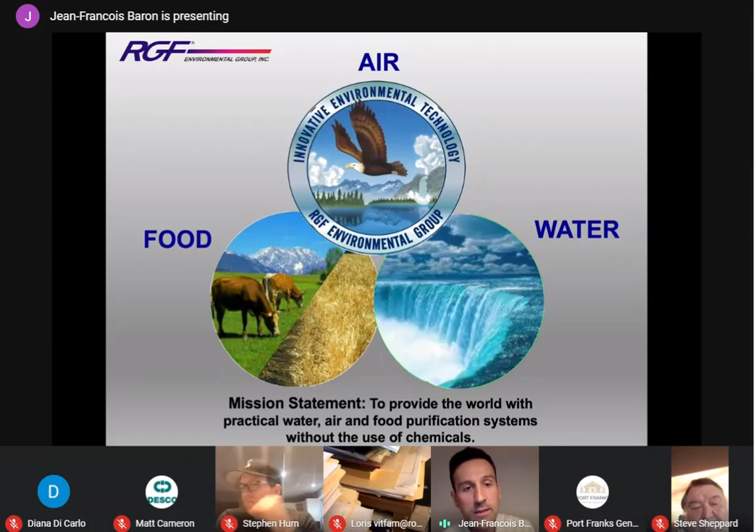We're going to talk today about products from RGF. RGF is a manufacturer based out of West Palm Beach, Florida. It's a private company, in business since 1985. They manufacture products for air sanitation, food sanitation, and water sanitation. They do mostly wash water recycling. Food sanitation is for food transformation plants. They use the same technology that we're going to discuss today to sanitize food in transformation plants.

This is the head office. As I said, it's located in West Palm Beach, Florida. It's about 100,000 square feet. During the pandemic, they bought another building of 40,000 square feet to do some vertical integration, meaning that they had a couple of subcontractors, third-party manufacturers that were manufacturing small parts for their devices, and a couple of COVID-19 outbreaks made these guys close for a couple of weeks, which slowed down everything.

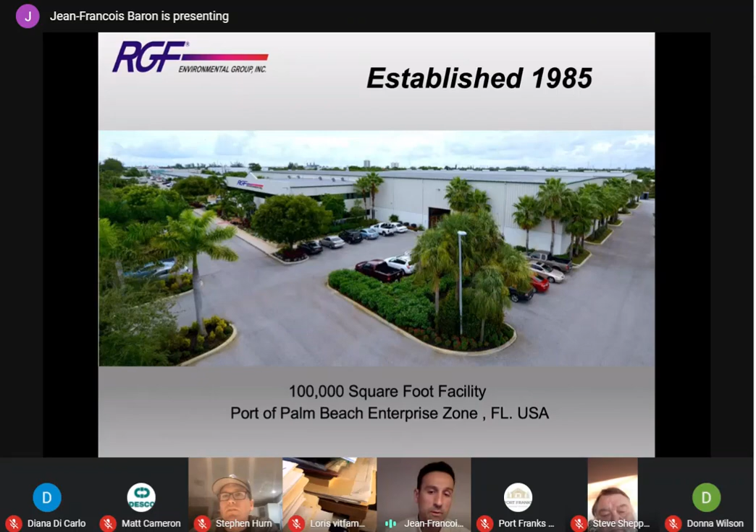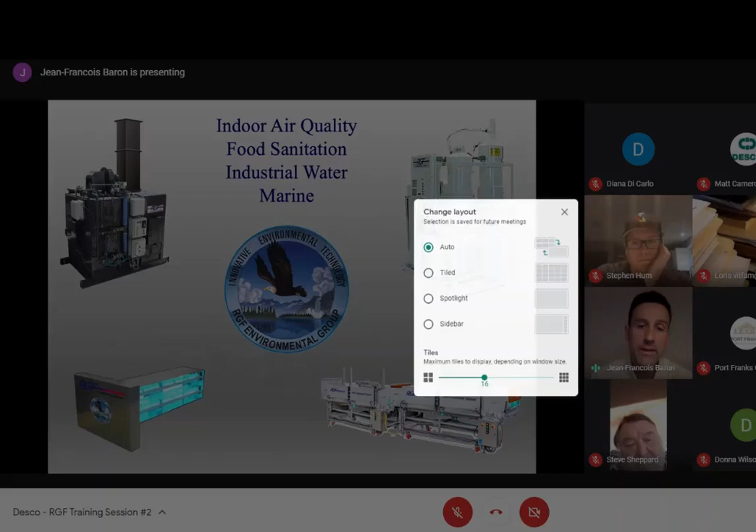So RGF decided to vertically integrate everything. So now everything is built and assembled in-house. They added a 40,000 square foot facility to the already existing 100,000 square foot facility. These are examples of different devices in water purification, air purification, and food sanitation. These are all RGF products, and everything is manufactured in Florida.

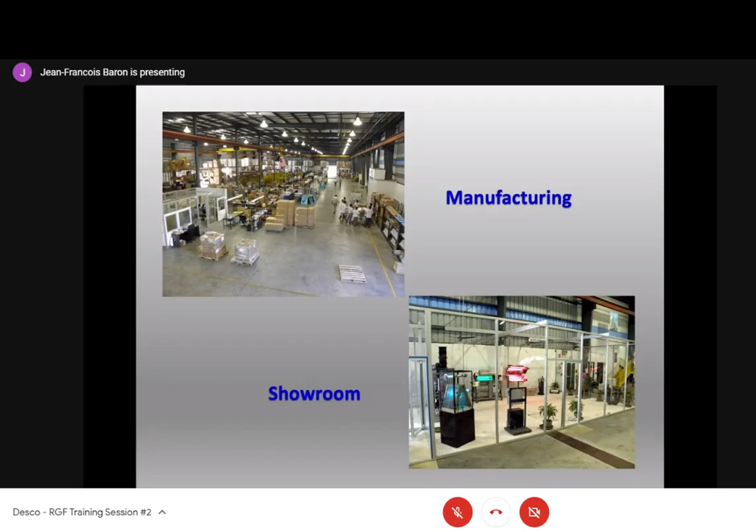The manufacturing facility, the picture in the upper left, is super clean, one of the most well-organized manufacturing facilities I've seen in my career. I worked in lighting, in automation, in different industrial equipment. This is a fantastic place. Everything is designed and built in-house. The showroom as well is very impressive. They have organized tours in the facility in Florida, and they're very much present in all the HVAC trade

shows in North America. They have a testing R&D lab and an electronics R&D lab as well for their research and development. You're going to see a new product using LED modules that was developed in the last few years and was launched a bit more than a year ago, the Halo LED. We're going to discuss it a bit later.

They also have results on tests that they conducted, but they do not publish the tests that they conduct. They have third parties, we're talking about universities and certified labs, do the tests and publish the test results. So they have independent sources confirming that the technology is very effective, very efficient in destroying air pathogens such as microbes, gases, smokes, and airborne particles.

RGF sells in China, and don't be mistaken, they do not manufacture in China. Everything's manufactured in Florida. In 2002 and 2003, when SARS hit Asia, RGF sales really had a big burst in the Asian market. So they do have a sales office. They sell a lot of products in Asia. They also sell in Europe. They have about 5 million units working right now around the globe.

And to give you an idea, in the last year, they had an increase in product demand of 1,000%. So the numbers of the year 2021 are going to be probably 10 times bigger than the numbers of 2019. A lot of awards, especially for their designs, a lot of patents as well.

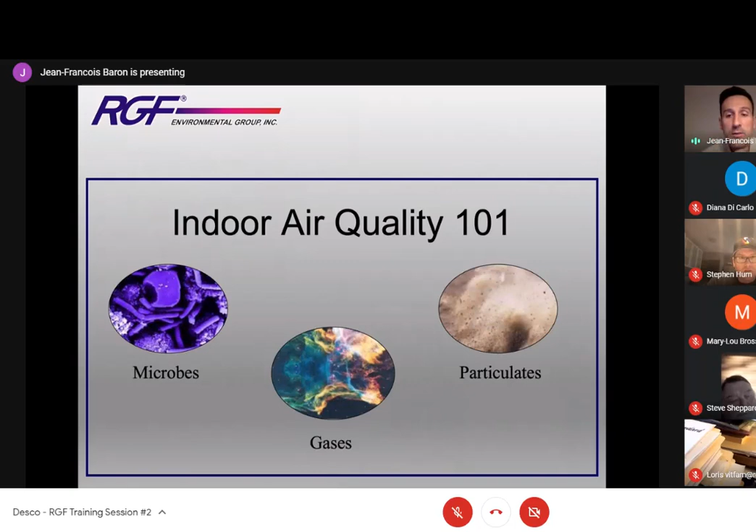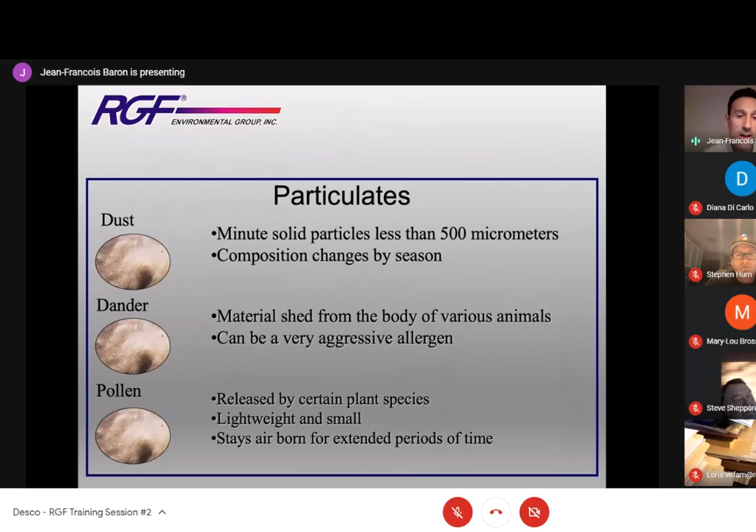So we have 3 different categories of pathogens that can be treated with different technologies. We have the microbes, the gases, and the particulates. The particulates in 3 different categories: the dust, minute solid particles less than 500 micrometers. Composition changes by season. The dander, material shed from the body of various animals, including humans. So you definitely have dander in your house, even though you don't have any pets. You have a lot more if you have pets. So this can be a cause of allergy. Pollen released by certain plant species, lightweight and small, they can stay in the air for a long period of time, and I'm sure some of you have some allergic reactions during certain periods of the year due to pollen floating in the air.

Microbes, we have 3 categories. The bacteria, examples are E. coli, Staphylococcus, Streptococcus, so these are all bacteria. Viruses, of course, we all know about COVID-19, Norwalk, which is the common stomach flu, SARS, avian flu, H1N1, these are all viruses. Mold, that are initially spores. So the spores will develop into mold when we have a perfect mix of temperatures higher than 30 degrees Celsius and humidity higher than 60%. So the spores will develop into mold in different areas where the temperature and the humidity allow for it to develop into mold.

I want you to pay attention to this graph. It's very, very important. It's very relevant to what we're living right now. These next few slides have been presented by RGF for the last 10, 15 years. In the last few months, the authorities, we're talking about Health Canada and CDC, the Center for Disease Control in the States, the 2 highest health authorities in North America, have been going back and forth as to whether the virus was contagious by air. So was it contagious by aerosol? Was it airborne? So now they're unanimous that the virus can be airborne. The virus can travel a lot more than that 2-meter social distancing.

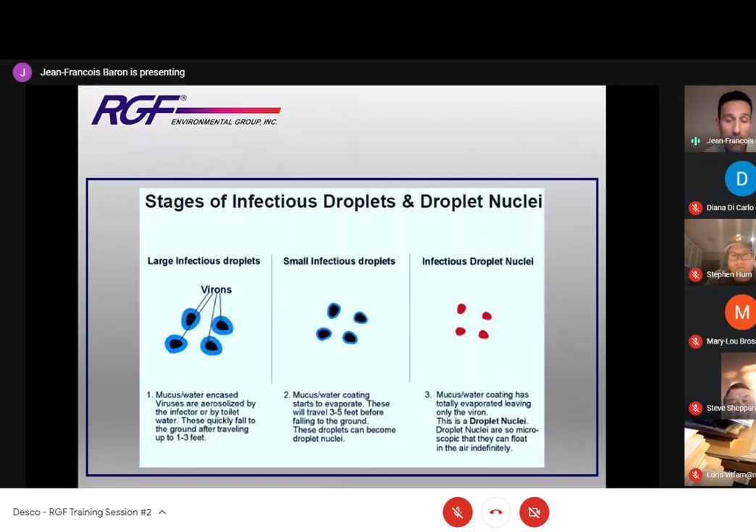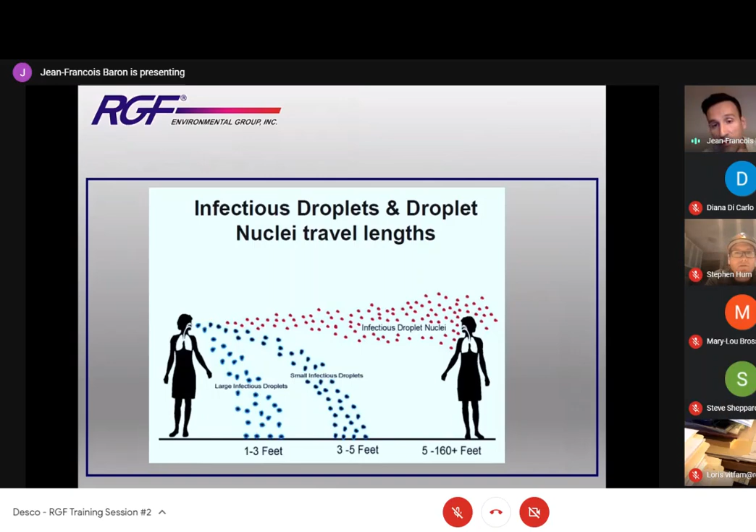So here we can see that the large ones will fall 1-3 feet. The small ones, slightly dehumidified, will travel 3 to 5 feet. But the infectious droplet nuclei at its most dehumidified form can travel up to 160 feet. So in a room where we have an infected individual coughing or breathing, the infectious droplet nuclei can travel much further than 2 meters. So it is very important for everybody to understand that the contagion risks are 20 times higher indoor than outdoor.

So having an individual that is infected, coughing or breathing, throwing some infectious droplet nuclei in the same room, if you don't have your mask, or if it falls in your eye or in your ear or on your hands and you scratch your nose a bit later, it's not the majority of the infections, but still this is one of the probabilities of being infected. So these infectious droplet nuclei can travel much further than 2 meters from one individual to the other, but they can also get back in the HVAC system and travel in the ducting.

So it's very important to know that this information has been promoted by RGF for a long time, and now this is actually endorsed and communicated by the highest authorities, which are Health Canada and the Center of Disease Control in the US.

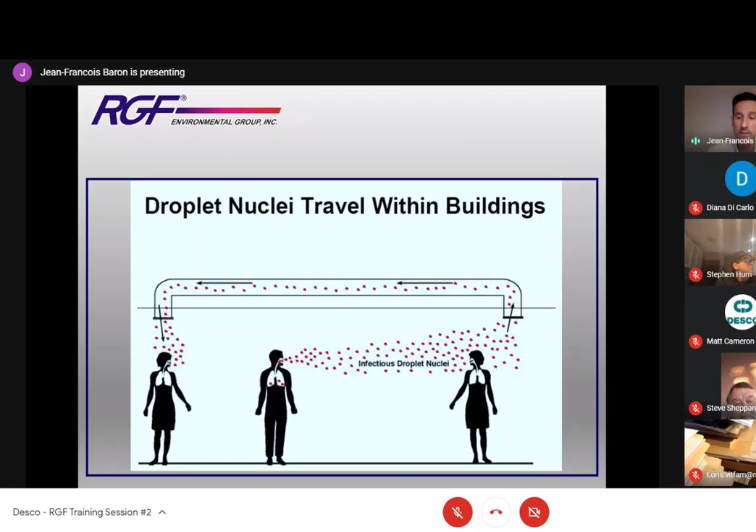Another pathogen, the gases, the VOCs, volatile organic compounds. If you walk into a new house, you're going to smell the paint, the varnish, the glue, the adhesives, carpets, cleaning agents, also nail polish, the presswood products because of the glue. So the VOCs can cause eyes, nose, and throat irritation, headaches, of course, in extreme cases, loss of coordination, nausea. Another gas type category are the odors, pet odors, perfumes, food odors. So we have the microbes, we have the particulates, and we have the gases that can be pathogens, bad for occupants in indoor air. So how can we treat these pathogens?

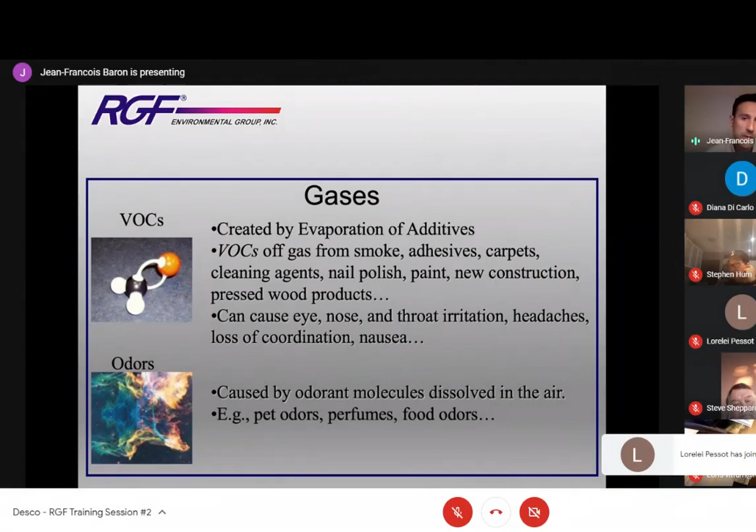So the different treatment technologies for microbial and gases, we're going to start by the oldest one, very well known by everybody, the germicidal ultraviolet light. So germicidal ultraviolet light was discovered in the 1950s. So it's a technology that was discovered 70 years ago. It's very efficient, it's proven, but it has some serious limitations.

So the germicidal UV light is a set fixed wavelength of 254 nanometers. So most UV lights that we're going to see on the market are fluorescent lights. And these fluorescent lights will have a specific coating inside the tube. It's composed of different phosphor powders, and it lets that specific 254 nanometer spectrum out. So that's the only radiation that will come out of that fluorescent tube. So ultraviolet germicidal lights are effective.

It destroys the DNA. But in order to destroy the DNA of an organism, such as microbe or virus, bacteria, or mold, it needs to be powerful enough. What we mean by that, the power of the lamp is important, and the time of exposure is important as well. So the closer you are to the lamp, the better it is. But the further you get away from that lamp, it becomes exponentially inefficient. So it's the inverse square law. So as further you get from that source, that UV source, it becomes exponentially inefficient.

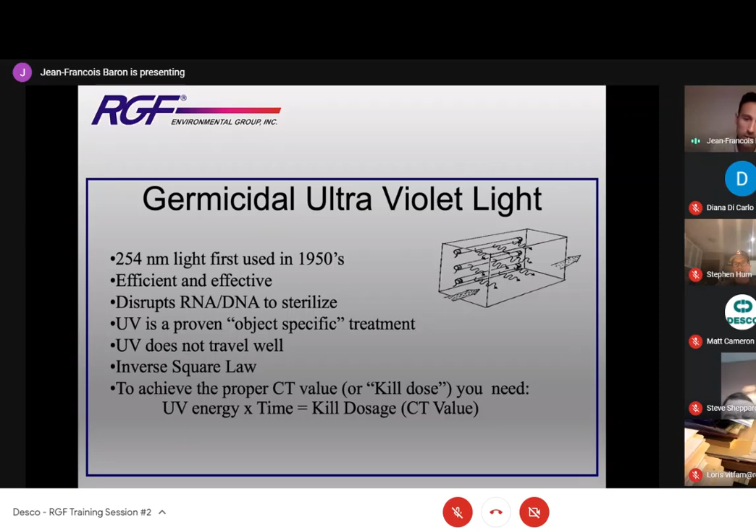Think of a candle like germicidal UV. If your hand is a foot from the candle, you don't feel anything. If it's 3 inches from the candle, you're gonna feel the heat. It's not gonna burn, but you're still gonna feel the heat. If it's 1 inch from the candle, of course it's gonna burn, but it's gonna burn you seriously if you stay there for a long period of time.

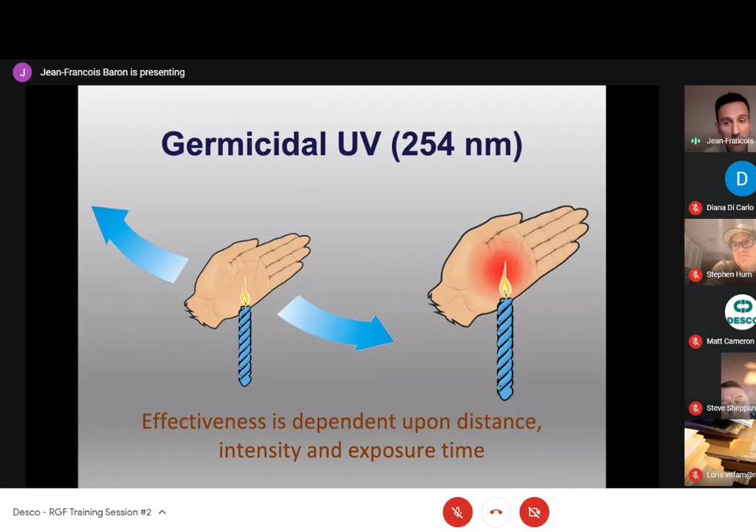So that's pretty much the same with germicidal UV radiation, germicidal lamps. It needs to be close enough to the source for long enough. On this graph, you see that UV germicidal lamps are passive air purification.

We have an example here of a system that is 1600 CFM that is going through a 16-inch by 16-inch duct, and it moves at 900 feet per minute. That's about 16 kilometers per hour, 10 miles per hour. So it's a 36-watt UV lamp. So it's a fluorescent 36-watt UV germicidal lamp. To show you how big it is, a 36-watt fluorescent lamp is about 3 foot. So it's a 3-foot lamp.

And on the first line, we see the distance. So we're considering the distance that the air and the pathogens are passing from the lamp. So at 1.5 inch, we have an effectiveness of about 100%. And this is because the minimum required sterilization time, so the time that the pathogen needs to stay exposed to the lamp, to that 36-watt lamp, is 0.18 seconds. So it flies by pretty quickly in that 1600 CFM system, and the microbe travel time is 0.16 seconds.

So it's slightly faster, but we're going to round it up to make sure that we're objective, and we have an effectiveness of 100%. So whatever pathogen passes by at 1.5 inch from that 36-watt lamp or less, it can, of course, be in contact with the lamp or be in between 1.5 inch and directly to the lamp. So everything that passes in that zone is going to be sanitized.

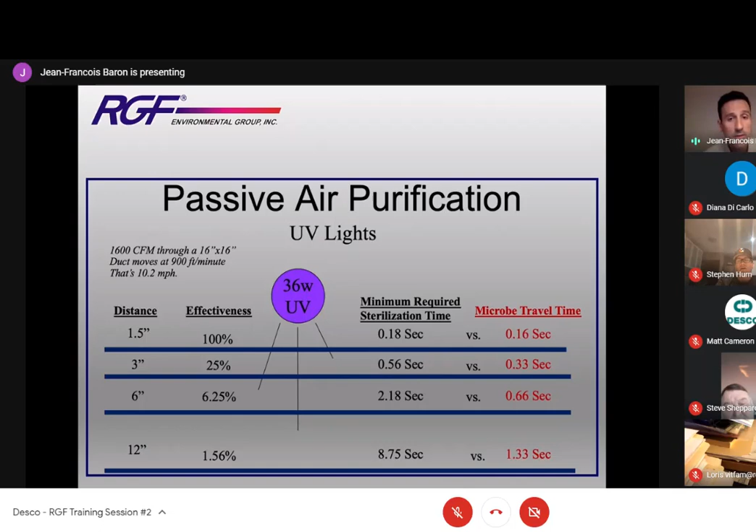But don't get me wrong, there's some applications where UV germicidal lamps are very effective. If you see here, a coil with a UV stick lamp is very effective because we have continuous radiation, and when the sticks are disposed, you have sufficient amount of UV lights on your coil, you're going to be able to keep it clean because you're going to have enough UV power for long enough continuous radiation on the coil, so it's going to keep it clean.

So as you can see on this picture, everything around that lamp is super clean, but as you get further at the right, you see that the mold has developed because UV does not travel. It's like the candle. If your hand's at 2 feet from the candle, it's not going to burn, you're not going to feel any heat. So it's the same with the germicidal ultraviolet light.

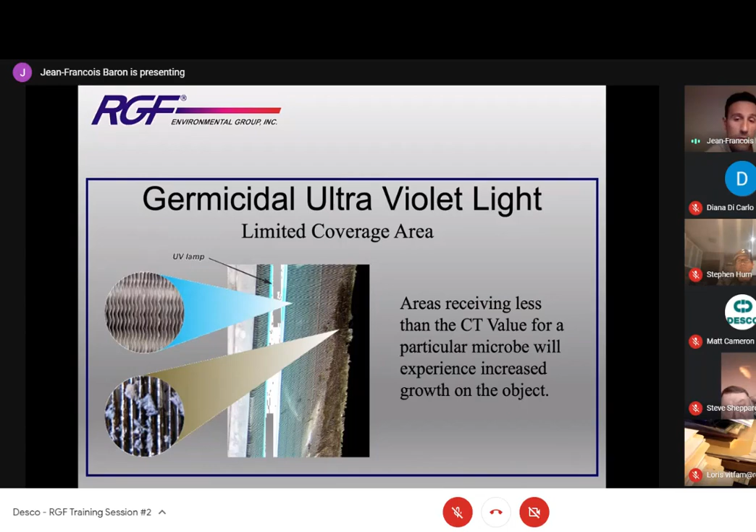So in order to keep your coil clean, you do a good installation, you have enough lamps that will shine properly at the right distance, and in continuous radiation, your coil is going to stay clean. But you need to make sure that you have enough UV lamps on that coil so it stays clean. For your information, RGF is manufacturing these UV sticks to install on the coil because this is the perfect application for germicidal UV lamps.

For air purification, it is very, very limited. The action on the air passing by is just going to be a small fraction of the full volume of air flying by that germicidal UV lamp. And it has absolutely no impact on the air in the environment and on the surfaces in the environment.

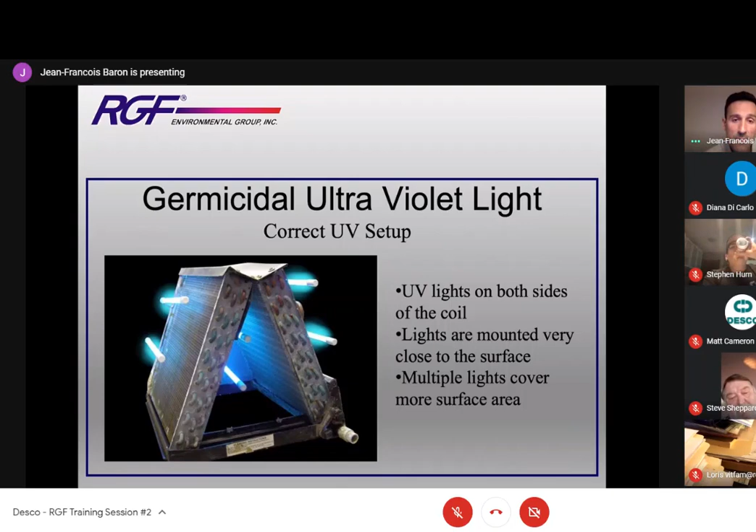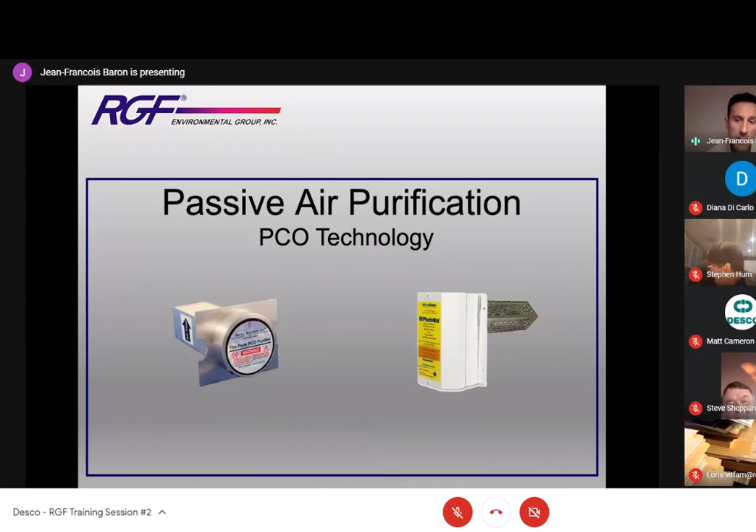So in there, you're going to have the power supply for the UV lamp. The UV lamp is going to stick out in that rectangular square tube, perforated tube on the other side. This will be inside the ducting at the return of the system. So inside of that tube, there's the UV lamp and there's a titanium oxide plate.

So we have a reaction that takes place on the surface of the catalytic bed. So it's an oxidation reaction. It's going to create hydroxide and ozone, and these oxidizers will destroy the DNA of all microbes. The higher the surface area and the more UV energy that reaches it, the more efficient.

So in order to have something that would be very efficient, and same goes for the UV germicidal lamps, we would need to have a wall inside the plenum. So it would pretty much block the airflow. We would make sure that all the pathogens are going through cylinders of PCOs, and it would have a very much maximized sanitation action. But it would definitely have a super high cost, and it would definitely impact the airflow of the system.

So the PCO is effective on the surface, in the volume of air of that tube, but outside of it, there's no oxidizers. So everything that goes through that tube is going to be treated, but under, over, and on the side, all the pathogens will just keep on flying in the system.

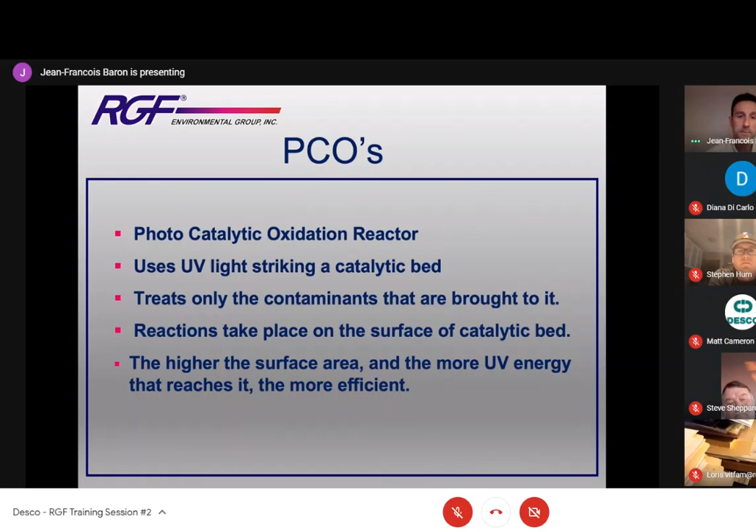Think of a bug zapper. You can have flies spinning around it all weekend. If they don't go inside, nothing's going to happen. So it's really within that cylinder that the sanitation action is happening. Everything around it, there's no action whatsoever.

Now we're going to talk about photohydroionization. So remember the PHI technology from RGF. So PHI, photohydroionization, is the creation of hydroperoxide from a reaction that takes place between UV light. So PHI technology is using UV light as well, but in a broad spectrum. So it takes place between the UV light, the air, specifically more the oxygen, O2, and water, H2O, and the quad metal catalyst. These hydroperoxides are friendly oxidizers, very effective in breaking down both airborne and surface-borne microbes.

So when we say airborne and surface-borne microbes, the hydroperoxides are stable enough to go in the entire volume of air and sanitize every cubic inch of air and every square inch of surface. So the devices from RGF are installed in the feeding plenum. And if you read correctly, you will see that the UV light, the air, and the quad metal catalyst are generating hydroperoxide. So the UV light is not used as a germicidal action. The UV light is used to generate an advanced oxidation process with the air and the quad metal catalyst.

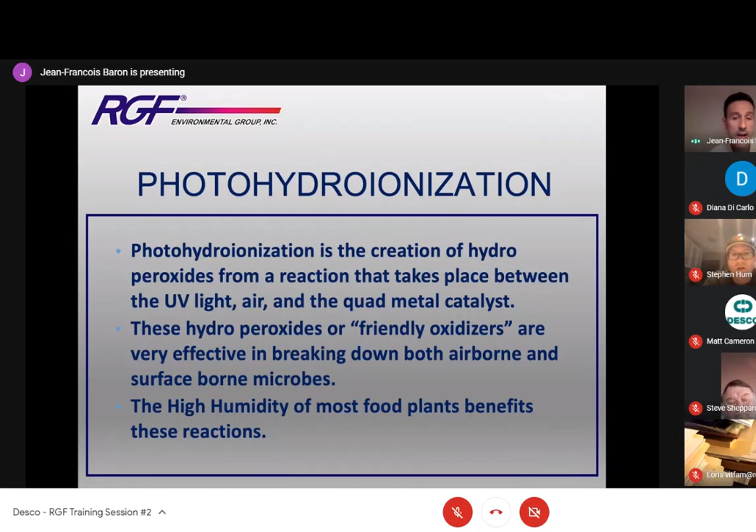Here we have a broad spectrum lamp, which is between 100 and 380 nanometers. So this covers UVA, UVB, and UVC. So we're not trying here to compete or to compare to UV germicidal lamps, because this is not at all the same action that we're using UV rays for in this technology. We're using the UV radiation to generate an advanced oxidation process. So it's not the UV light that will sanitize the environment, it is the hydroperoxide ions that are pushed in the entire volume of air and on all surfaces.

Around that lamp, you see that perforated grid. This is the quad metallic hydrophilic coating. So that quad metal has titanium, rhodium, copper, and silver. So this composition of metal, the broad spectrum lamp, with the interaction of the water and oxygen in the air, creates the advanced oxidation process.

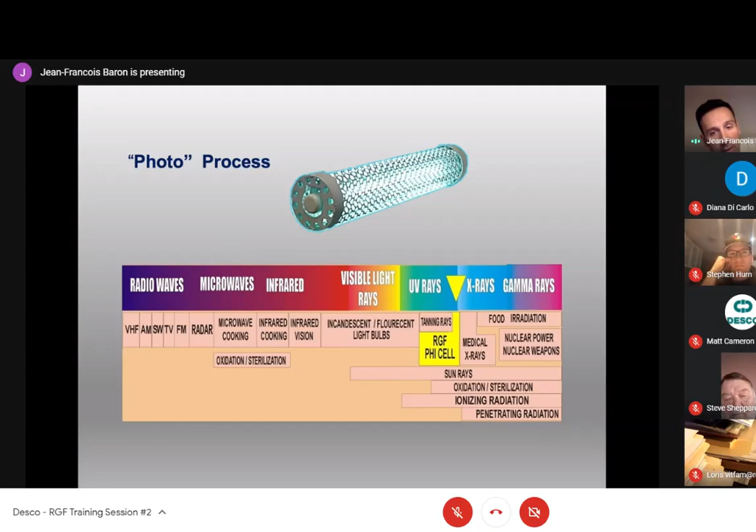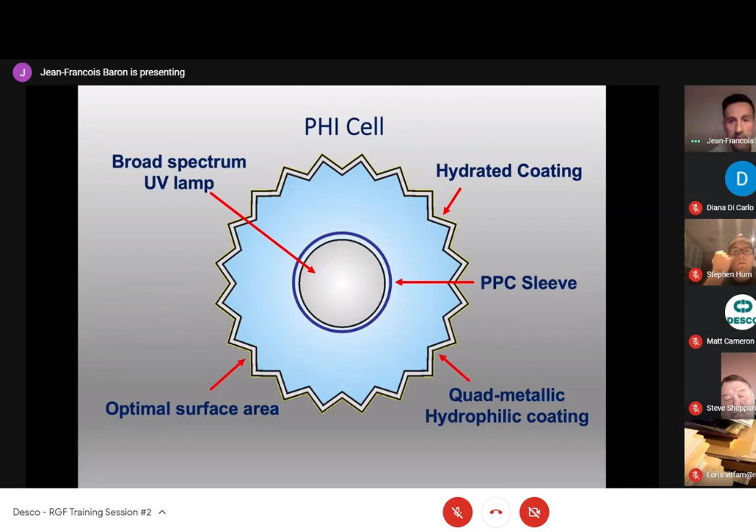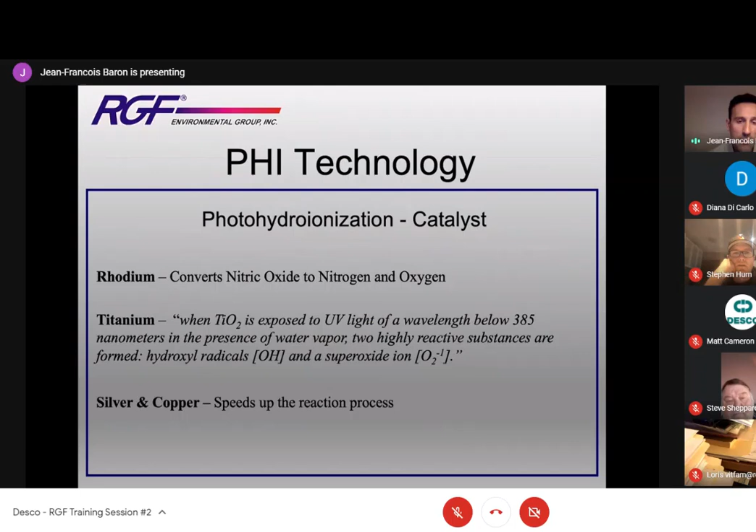So here we have the different metals used in the catalytic bed: rhodium, titanium, silver, and copper. So here we have the reaction happening with the catalytic grid. The important thing to remember is that the catalytic grid is not wearing out or decomposing. The metals that are on that grid around the lamp are just going to stay there. They're going to stay the same.

They do not change the composition of the air because it's H2O, the water vapor, and O2, the oxygen, that will convert in the advanced oxidation process into H2O2, which is hydroperoxide. So the hydroperoxide ions are active for about 15 minutes in the environment. If they do not run across a pathogen, they're just going to revert back to oxygen and humidity. So H2O2 is going to go back to O2 and H2O.

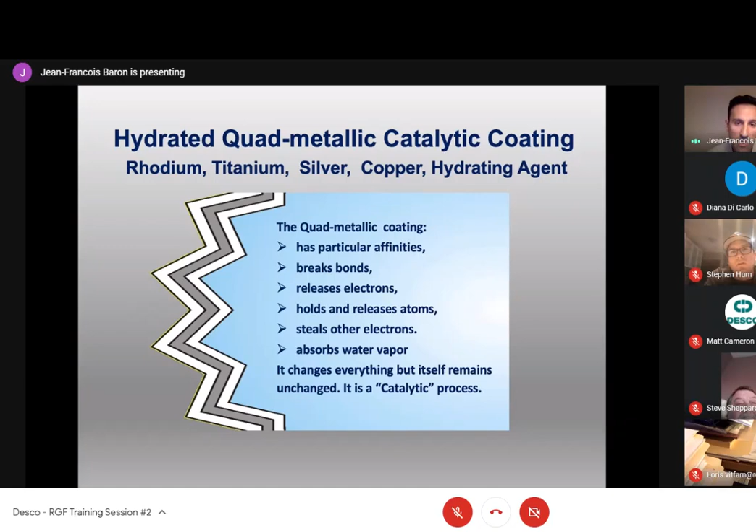And if they get in front of a pathogen, they attack it, destroy it, and they revert back to oxygen and humidity. So it does not change the composition of the air.

So why is the PHI technology so unique? By utilizing a broad spectrum lamp combined with PHI target, which is the grid of titanium, rhodium, copper, and silver, we not only produce conventional AOP, advanced oxidation process reactions, on the cell surface, we also produce advanced oxidation process reactions within the air that passes through the cell. Hence, the hydroperoxide ions that are freed are pushed in the entire volume of air, and they kill the pathogens on the surfaces as well.

RGF, as I mentioned in the beginning, is very, very keen on testing everything. So they did a sneeze machine. It's a very interesting invention. They're going to take some fluid loaded with microbes and shoot them out at the speed of a human sneeze, about 100 miles per hour. It was proven by independent tests that all the viral charge in that fluid pushed out as a sneeze was immediately reduced by 99% within 3 feet of the outlet of that sneeze machine.

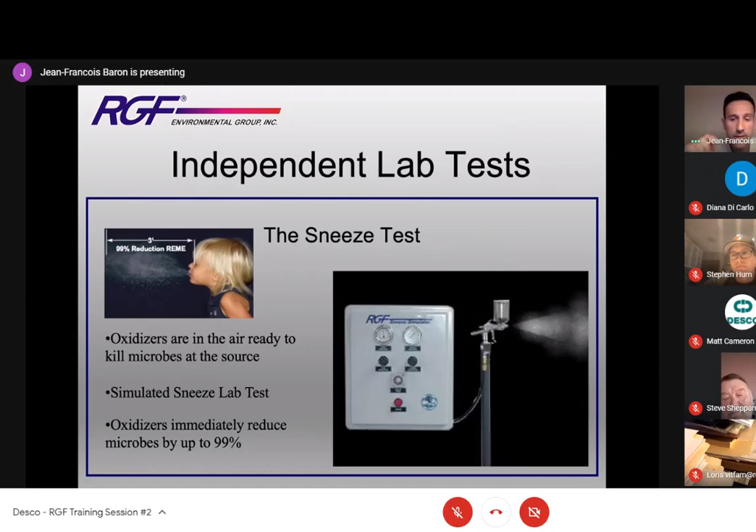So, important thing to know, there's a lot of products out there that will claim that their technology eliminates viruses in the air. The thing is, you always need to know what's in the fine print. So we have competitors that will do some tests in very tiny biochambers. I'm talking about something as big as a microwave or even a shoebox. Any electronic that you turn on in such a small volume of air would generate some ozone. And that concentration of ozone would destroy any pathogen, virus, microbe, bacteria, mold in that small volume of air.

On the other hand, RGF is testing in real life environment. So the biochamber in which they completed the test is over 1,200 cubic feet. And the tests were conducted with the viral charge on stainless steel. There's a lot of manufacturers that will claim that their device kills all the viruses in a very short period of time, but some of them are doing tests with their viral charge on aluminum.

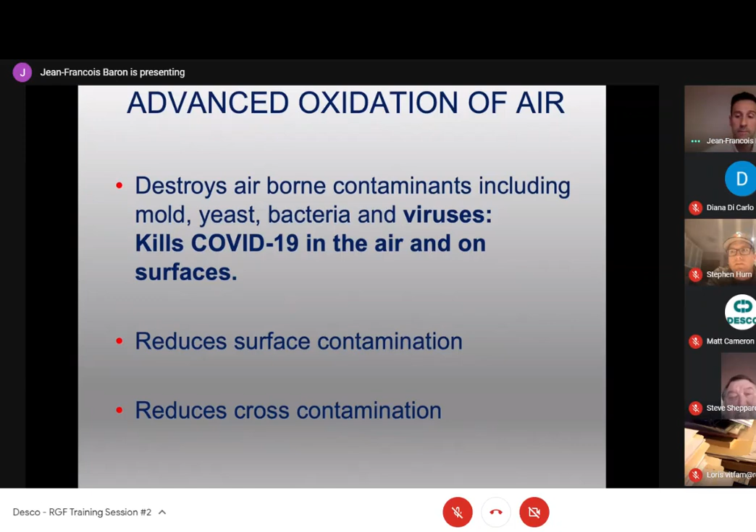So all UV lamps will last... Fluorescent UV lamps will last between 1.5 to 2.5 years. So that's the maximum that you can get out of a fluorescent UV lamp, all manufacturers together, it's always the same technology of fluorescent lamps. So this one here has a warranty of 7 years on the power supply and 4 years on the LED modules. It's also certified zero ozone.

So all fluorescent lamps for UV germicidal applications will emit ozone, but they're within 0.05 ppm of ozone maximum. So this is the standard for North America, for Canada and the States. This device here, the Halo LED, is certified zero ozone. So instead of having a maximum of 0.05 ppm of ozone, it is below 0.005 ppm of ozone. So it produces pretty much no ozone and is going to be a lot more effective in producing hydroperoxide.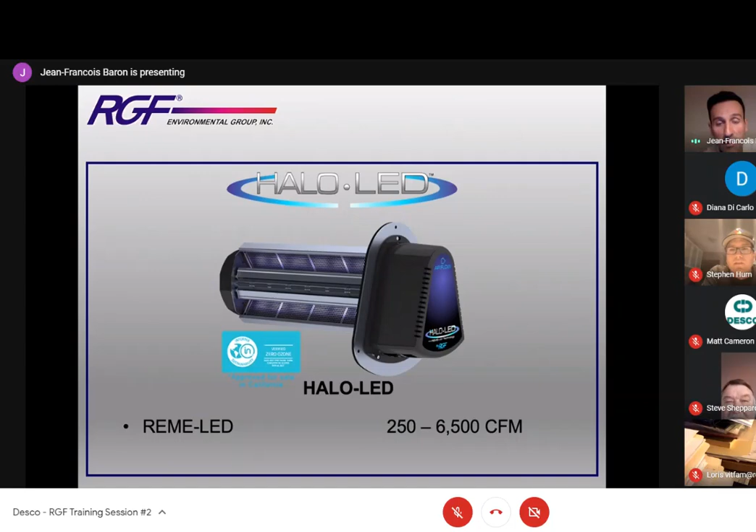The REME Halo. So this one is using the PHI technology with a fluorescent lamp. It's going to be good for systems between 1,000 and 6,500 CFM. Very good product as well. Its maintenance is a bit more frequent because of the fluorescent lamp, which has a 25,000 hour lifespan. So you would need to change the cell every 2.5 years. Very simple. You don't really need any tool. It's all quick connect. You disconnect the lamp inside and you connect the new one with the cell, and that's it.

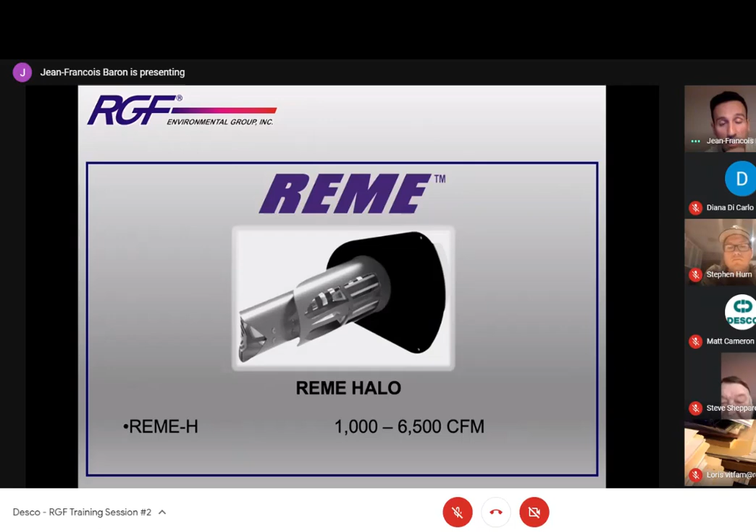The REME Ion, this is a tabletop device, slightly bigger than a can of pop. It uses LED technology as well. So you can have that square plate with the LED modules that generates the hydrogen peroxide with the advanced oxidation process. It also has a bipolar ionizer integrated. It has a very quiet fan, very nice design. That white button is just a touch button, very, very effective. Very quiet. It covers up to 200 square feet, and also you have as an accessory a USB cable. This works on 12 volts, so you could actually plug this into a car when buying the 12 volt USB cable.

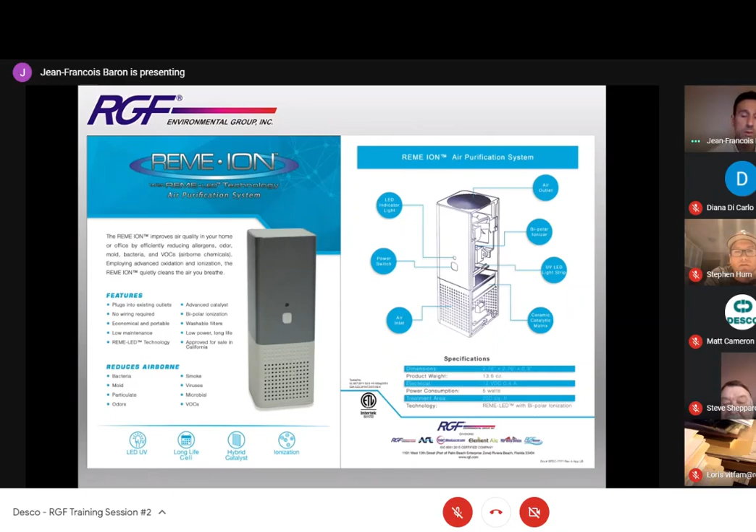The Halo Rove, that product is fantastic for areas where you don't have HVAC systems. So it is available in 120 volt and 12 volts. So the 12 volt version is going to be good for transit. We're talking about school buses, coach buses, trams, metro wagons. It can be attached to the wall or just on the desktop. It's a very solid aluminum enclosure.

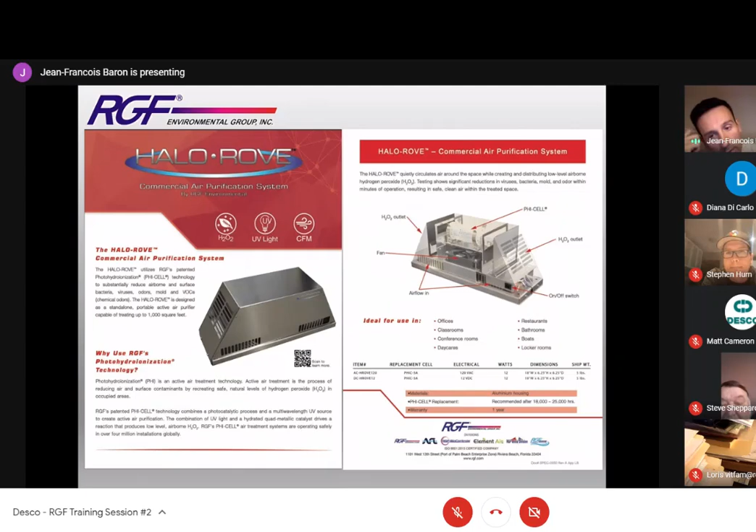You have the PHI cell inside. The fan is 75 CFM, and you have the outlets on the sides where the hydrogen peroxide is freed in the environment. So as I said, it's available in 12 and 120 volts, and it covers up to 1,000 square feet.

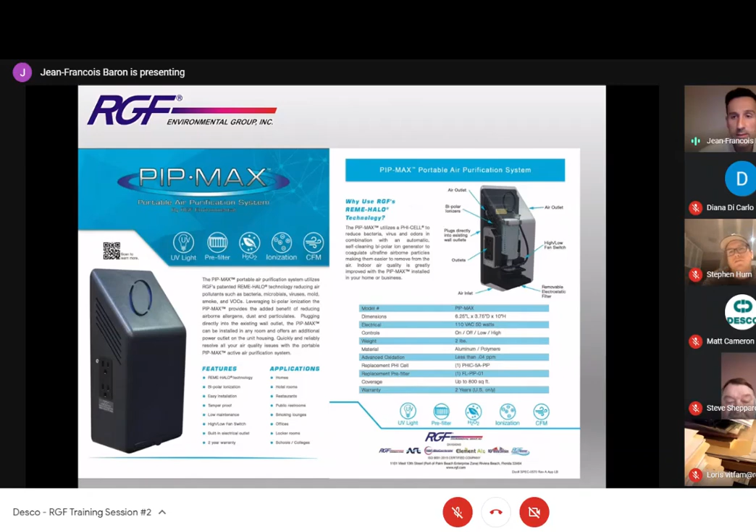The PIP Max, that device goes directly over an electrical outlet, so a regular double electrical outlet on the wall. You don't lose the outlet, as you can see on the box on the side of that enclosure. You still have the outlet on the side. Also, that device has an integrated bipolar ionizer. So the PIP Max covers up to 800 square foot, and it's a 2-year warranty on that device because it's using fluorescent technology.

The Guardian Air, you can recognize the PHI cell. It's a longer cell, it's a longer lamp. It's going to generate some more hydrogen peroxide. It's good for systems between 10,000 to 18,000 CFMs.

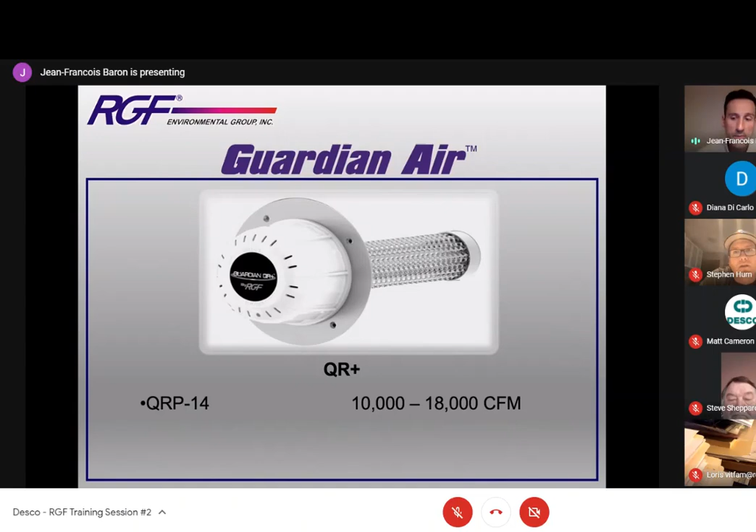The mini split unit, so you can see that strip on the top of the mini split head. The PHI cell is going to be in the center of that, and there's some baffle directing the air towards the cell that goes inside the head and that are pushed outside with the fan of the mini split head. So 2 major benefits. Of course, you're pushing some hydrogen peroxide in your full volume of air in the environment and sanitizing the surfaces as well. That's number 1, very important.

But you have the oxidizers passing through the head, so there's a lot of mold developing in the mini split heads. So you're pretty much canceling the maintenance. When you have that mini split PHI unit, it's going to keep your mini split head clean, and you're not going to need to clean it once in a while because with all these oxidizers going through it, the mold is never going to be able to develop. It's good for systems between 250 and 2,000 CFM.

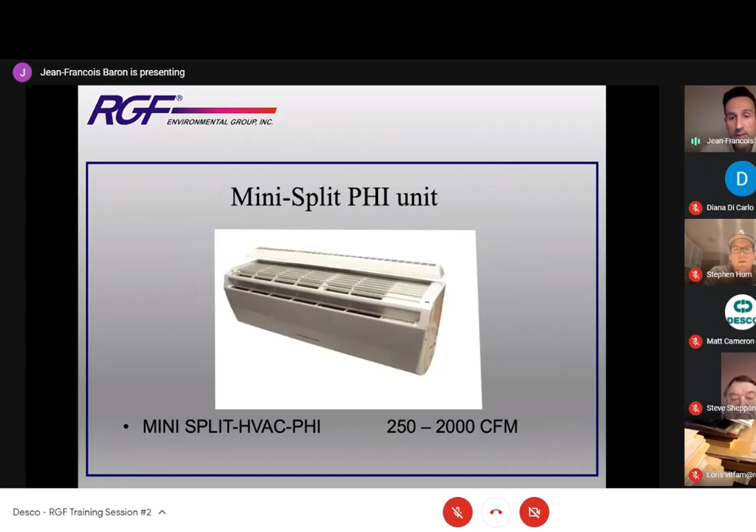One more thing, it's available in 110 and 220, depending on the voltage of your mini split head, and it's installed either on the side or at the back of the head. You can have a knockout, you just connect it in the breaker inside the head.

The package unit, this is a different model. The enclosure has the power pack included inside because that unit is going entirely in the plenum. It's going to be either installed on top of the air handler or on the walls of the ducting. There's 3 different models, and you have the PKG5, PKG9, and PKG14 with different brackets of CFMs.

It's very easy to install because it has magnetic feet on it. So you see these square feet on the corners. So you just stick it to the top of the air handler or on the ducting and connect it to 24 volts. So you know all the in-duct devices from RGF are working on 24 volts.

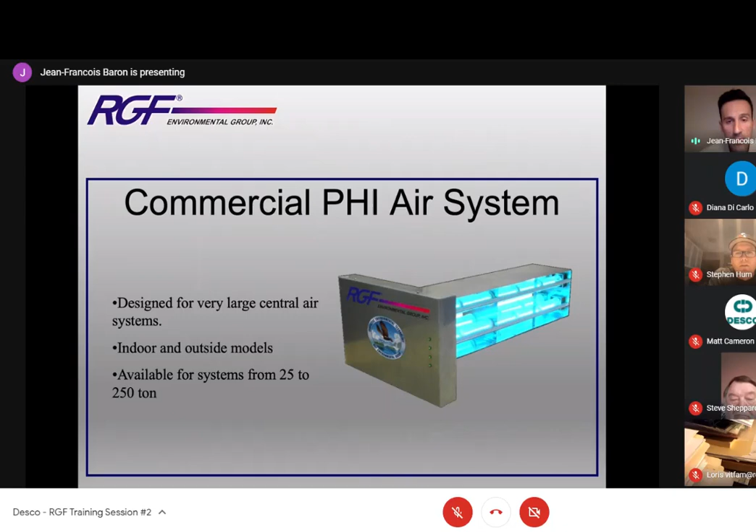This is the CML, commercial PHI air system. So CML is for big systems, for larger rooftops. It's available for systems between 25 to 250 tons. It can be installed inside or outside. If you install it outside, you're going to need a NEMA enclosure over the electronic enclosure.

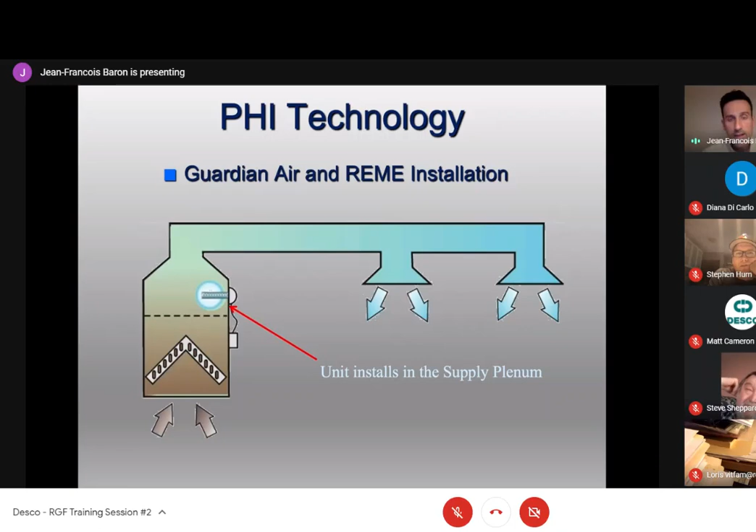Here we have a typical installation of the Guardian Air installation, Halo LED. It's in the plenum. So we want to have that maximized pressure of filtered, treated, humidified air going through the PHI cell, generating the hydroperoxide ions, and these hydroperoxide ions are then pushed in the entire volume of air through the ducting. So it sanitizes the air in the ducting, the surface of the ducting, and then it goes outside in the full volume of air and sanitizes as well all the surfaces.

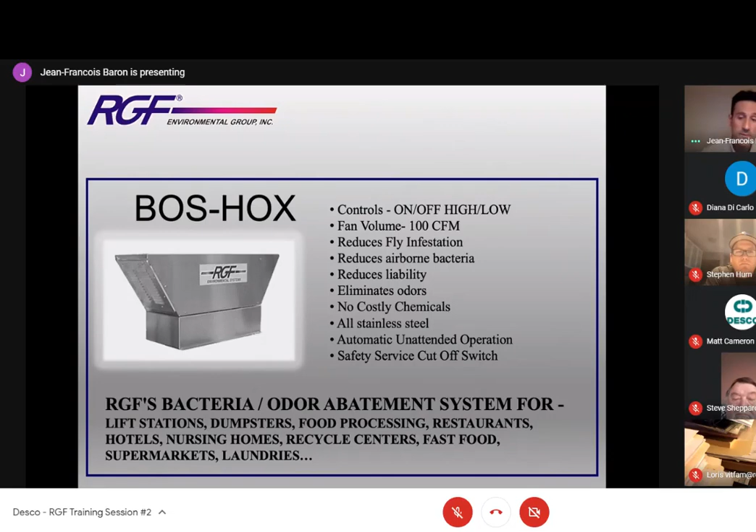So that's pretty much it for the crash presentation on the PHI technology. So it's 7:40.